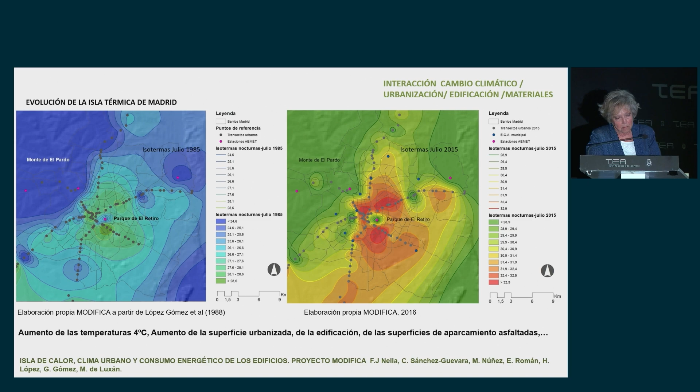1985 is the first one. That's not that long ago, really, but we can see that the range of temperatures, well, we can see a 4-degree temperature increase in the heat island, not the average temperatures. This is Madrid specifically. We measured temperatures at nighttime between the hours of 11 p.m. and 1 a.m. There's lots of things at play here, of course climate change, but also an increase in urban surface, more buildings, and so greater inertia at these temperature increases. And there's been such a great increase in temperatures because there are so many parking lots that are asphalted, and so they retain that heat.

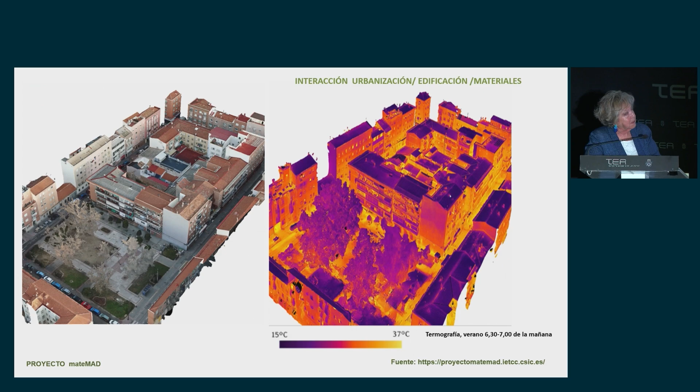These urban conditions, the conditions in these open spaces, are being determined by the buildings that surround them. This happens all the time. This image shows the Calle Hortaleza, a street in Madrid. For the apartments at the upper levels, there is a certain set of conditions. We can see that in the winter months they harness this sun to warm up the interiors, but in the summer months they need to be protected. In winter this is a positive thing, but we need to protect the entire facade of the building.

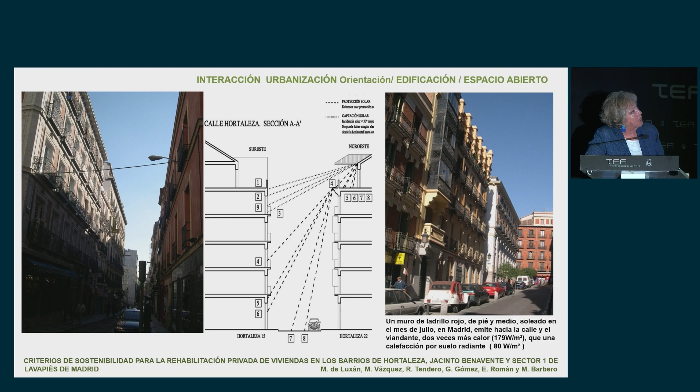So the temperature doesn't increase too much during the summer months. Urbanism requires that these buildings be adapted to meet these different needs. You can see, though, that there is a wall of 1.5 feet of red brick, which is emitting to the streets twice as much heat to the passerby than underfloor heating would. So what's happening is that these walkers will suffer from heat as they walk around the pavements of this neighborhood. This is something that we see all the time.

Oftentimes we want to label things, we want to name things. We say it's very hot, yes, but we need data.

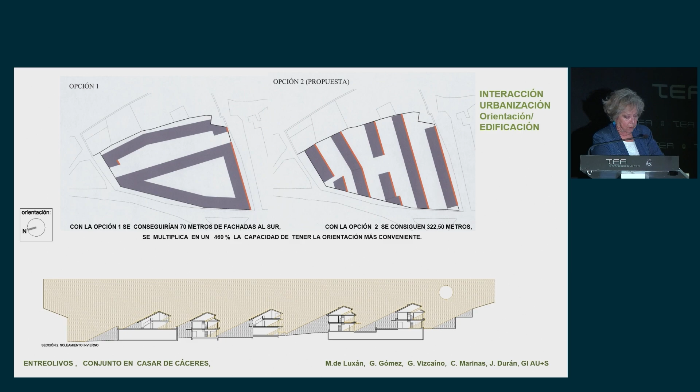What we did was separate the wings of the building so that in the winter months the dwellings would have sunlight. These 4 hours during the middle of the day have enough sunlight to warm up these apartments.

So what this is, is a passive solution which orientates the building in the best possible way. So, of course, there are synergies that exist between urbanism, the buildings, and the systems.

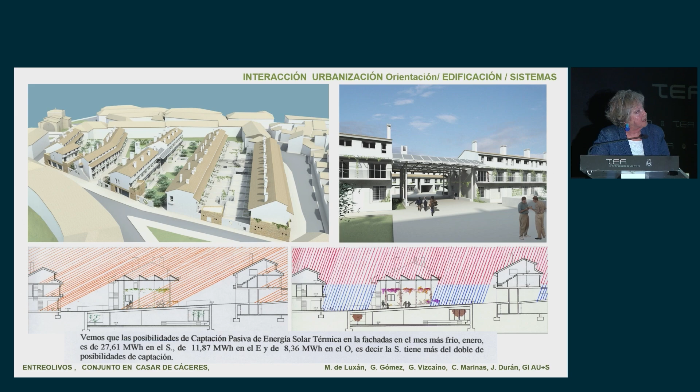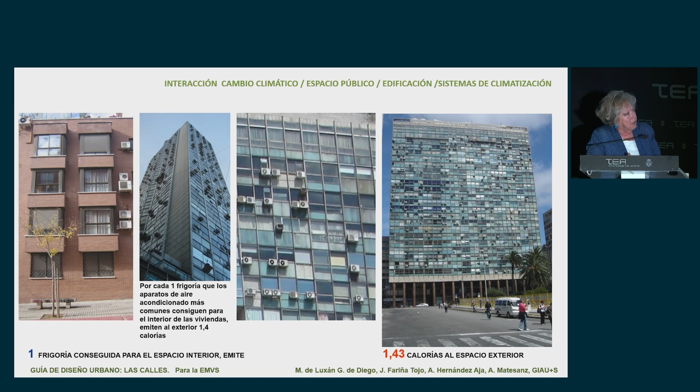And these figures are quite shocking. And everything has an effect, ultimately.

Nowadays, with cars releasing CO2 that accumulates at street level, these ventilation panels can't be used because it would mean all of this contamination would enter into the buildings. But when we move towards electric cars, this will no longer be a problem.

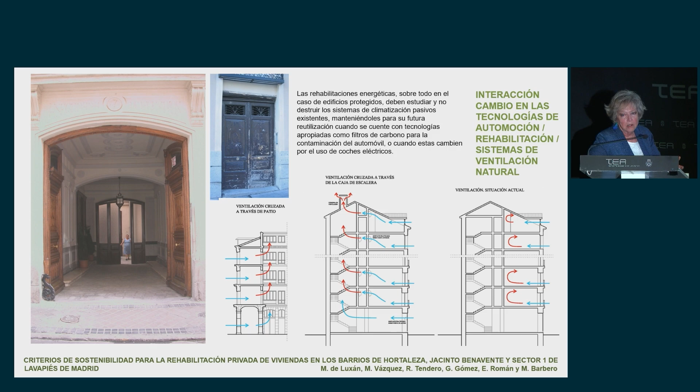So we need to actually protect these traditional ventilation systems for this future scenario of the cities. Even the tiniest detail has an effect.

Unfortunately, this isn't the right decision for the building because it was never designed to have a facade like this. And this trend has been copied throughout the town. Even the main church, the castle, have been renovated in this way, but mostly the housing.

So what's been the effect of this? Well, the town council actually made these homeowners do their renovations in this way. And this is happening in lots of places in Castilla-La Mancha. They require that 70% of the facade should have this stone on show.

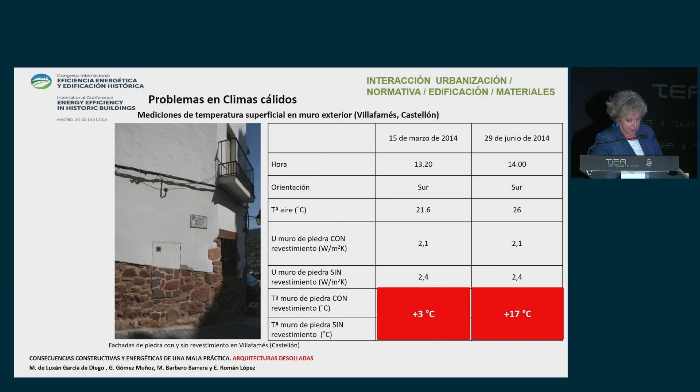So small decisions have a big impact. And of course, for a pedestrian now walking through this town, the thermal experience is completely different.

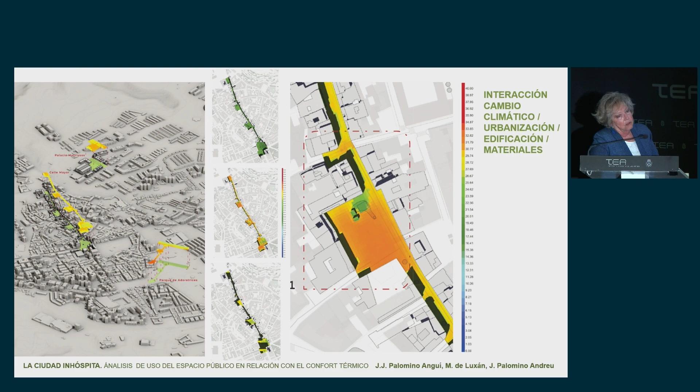We carried out another study entitled The Inhospitable City in Guadalajara capital. What we did was measure the temperatures of elements in public spaces every 2 hours over the course of 2 days in August. We wanted to see how the temperature differences would impact the usability of these different elements. It was a big study, so I'll just give you a few details.

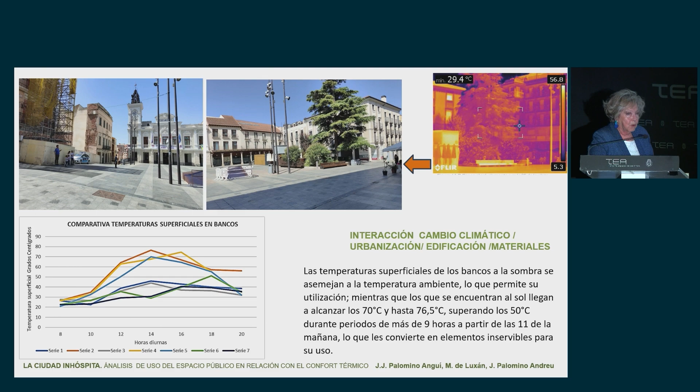We found that the benches in the shade maintained more or less the ambient temperature, but the benches in the sun, shown as the red line in the graph underneath, reached above 50 degrees Celsius by 11 o'clock in the morning, maintaining this temperature until 8 p.m. It actually reached up to 76 degrees Celsius at midday. So of course this means that the only people enjoying this square are those sticking to the shade around the periphery.

In this square we can see some ventilation shafts. They built an underground car park underneath, which has its ventilation shafts via these very pretty metal structures. These have been used by children from the town as a slide, and they love to play on them.

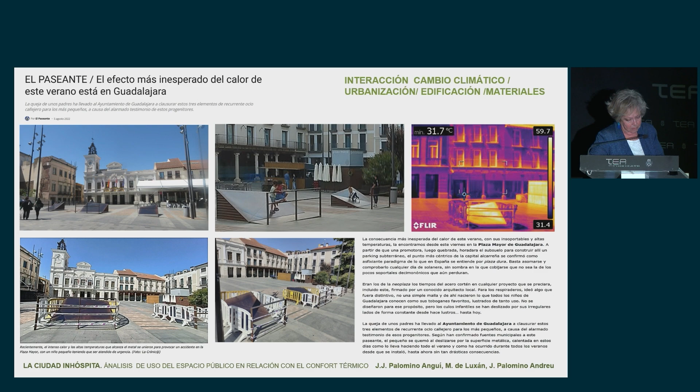Here we have a news article from the local newspaper talking about the most unexpected effects of the summer heat. They had to take one child to A&E because he burnt himself quite seriously on the metal of these vents. Now there are fences guarding them, but once again there's no one there—you can't sit on anything because you'll burn yourself. So once again, we can see these small decisions having big consequences.

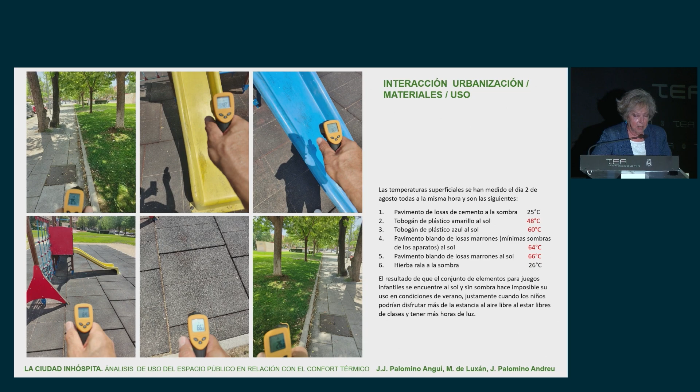Ultimately, these investments are not able to be used.

Here's another example, in El Toyo, Almería. It's an urban development—we won a contract to build over 100 dwellings with swimming pools. You can see it's right by the sea, and at the very top you can see the wind directions and their frequency. We could use this data because we needed to ensure there was ventilation in these dwellings, harnessing the sea breeze.

But there were some hotels on the first line of the beach, which meant we were only able to take advantage of some very narrow ventilation routes. Still, we needed ventilation—if we wanted to build bioclimatic housing that was low energy dependent, we needed to harness these sea breezes.

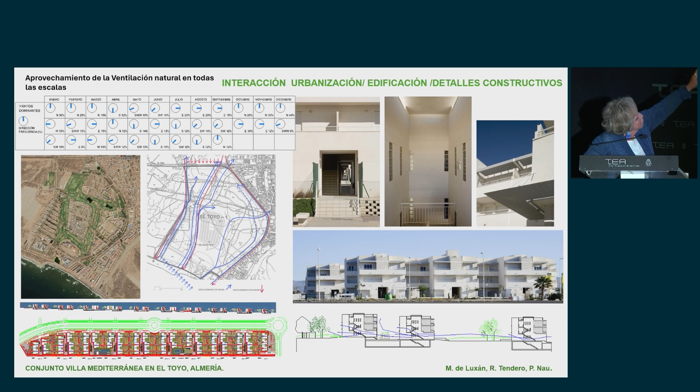So what we did was create these wind corridors that went through all of the different blocks. They were oriented towards the south, but they were blocking the wind, so we put some wind chimneys, or ventilation shafts, in place. We weren't able to use cross ventilation, so...

We also ensured that the stairwells were open air and in the shade as well. We really looked at all of the little details—we had elements that cast shadows on public spaces, and made sure these elements were separated from the facade so that the heat accumulating on the facade was able to escape as well.

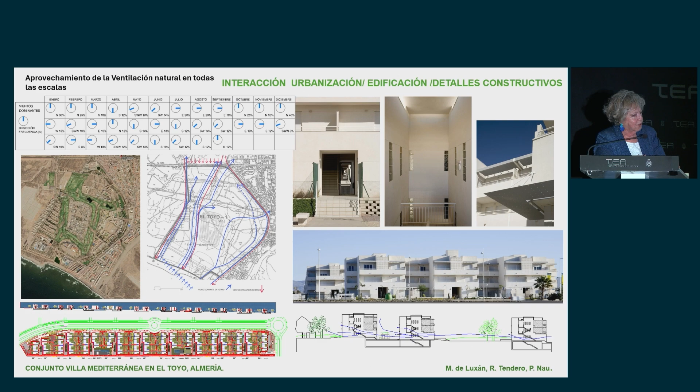So this is a large-scale project now. We've seen small-scale examples before, but what is in common with all of these things is this attention to detail, because otherwise we can find real contradictions in our designs.

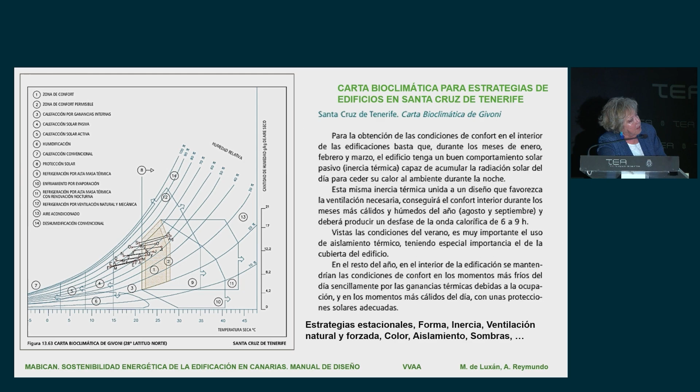What about Santa Cruz then now? This is the bioclimatic graph here. When it comes to climate comfort, we could absolutely meet these biocomfort needs passively. We can ensure with designs that there is enough ventilation, and shade. There are a whole series of season-based strategies. We can work with thermal inertia.

We can work with positioning of insulation, shades, all of these kinds of things. Now, look at this graph for outside spaces. This is very similar. We can see that from a certain moment in the year, we need to sit in the shade. We need shade in order to have thermal comfort. Once again, there are lots of strategies that we can use. We need to move air around 4 to 5 meters per second. The architecture needs to bear in mind this climate.

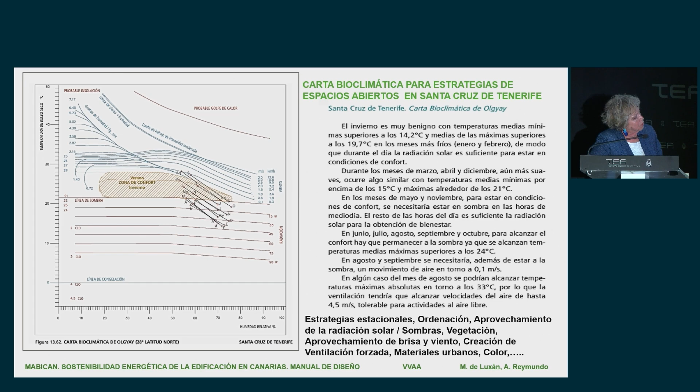If not, then of course we need energy for all of our devices, but we could be saving a fortune on air conditioning units if we were to bear in mind these strategies. We have amazing conditions that we're working with here.

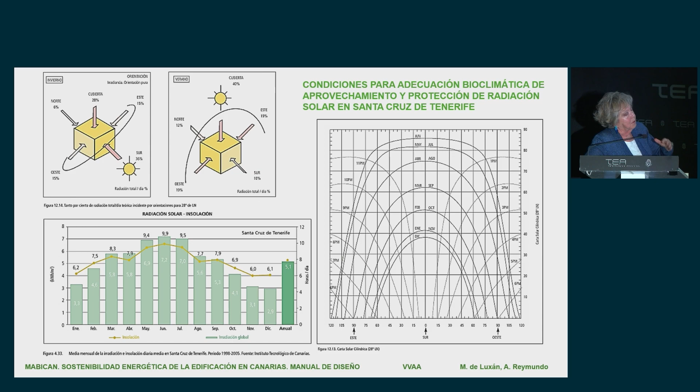There is a very, very high level of solar sunlight exposure, around 70% in the summer months. So if we need sun to warm, in the winter months rather, plenty of sun to warm ourselves up in the winter. There is also a great change in the sunlight that we receive in the winter and the summer months, so we can design our buildings to use the sun to our advantage.

We have a lot of examples of these curved building facades that have sunlight in the winter and shade in the summer. We can correct orientations of buildings by using elements that catch the sunlight or shade us from it. There's an awful lot that we can do, as I say, because we have these excellent starting point here of the climate conditions.

Here we have some images that look at ventilation in Santa Cruz. It's something that we can harness. The wind moves fast enough for us to be able to really utilize it, as long as we don't create obstacles for that wind. But we do have around 14% of time in the year where there is no wind.

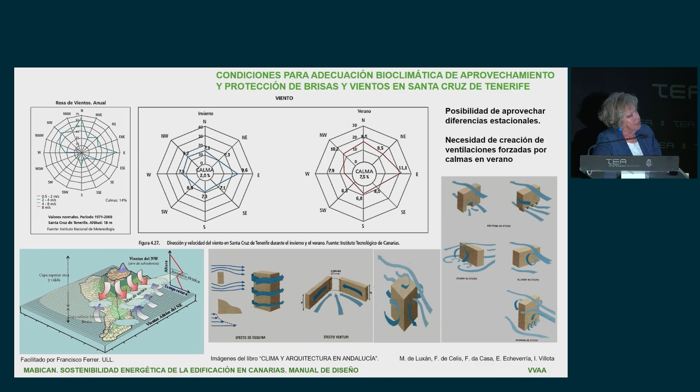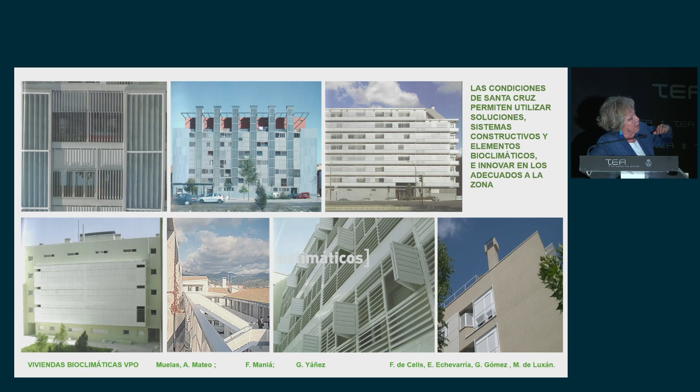So at these moments, we need to find a way to move the air with passive systems. I'm talking about positioning of buildings that create currents that ventilate the entire facade, among many other things. Another thing to mention is that we should also use these light wells to give light to the dwellings without them warming up the whole facade.

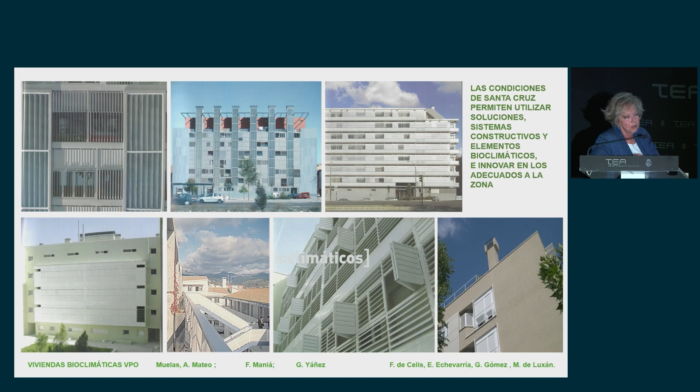We need to harness our natural conditions, as I said. Now, in conclusion, basically what this slide says is that interactions are key. We can measure this data so that every small decision is taken in a sensible way. We have to think about urbanism, architecture, and building in a coherent way. These three things need to be connected and need to work together, not in isolation.

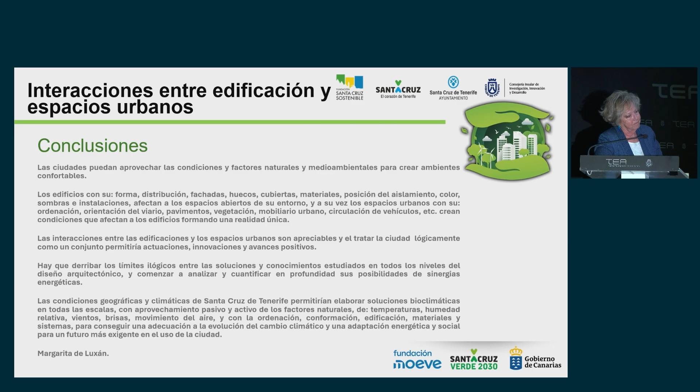These things need to be addressed in the urban plans, in every single construction project that takes place. In Santa Cruz, bioclimate architecture is definitely a possibility. Thank you.